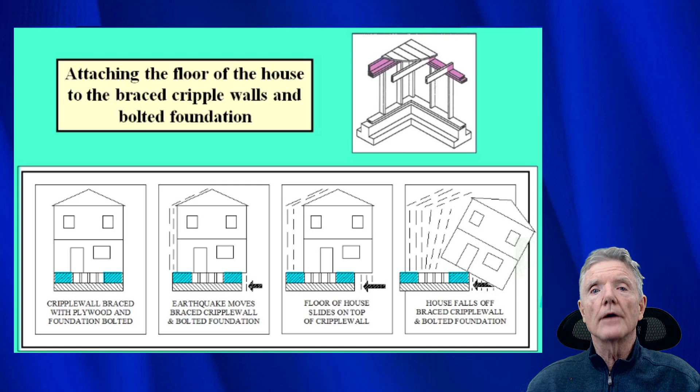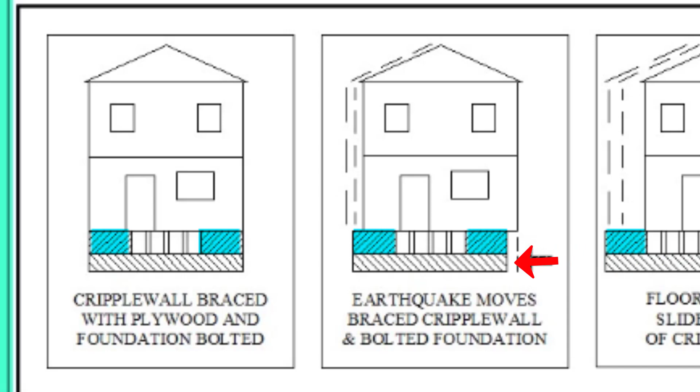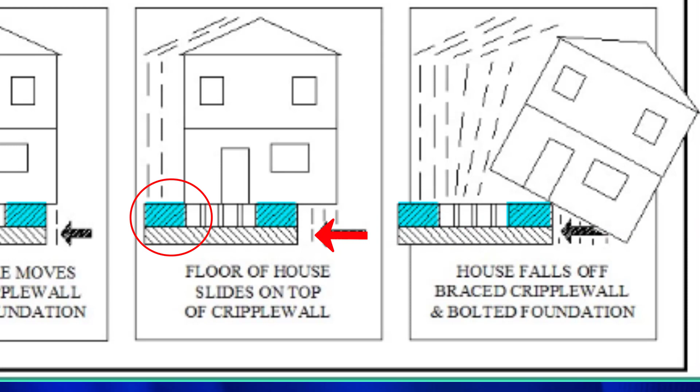So here you can see the braced and bolted cripple wall sitting on the foundation. As an earthquake force comes again and pushes underneath the house as the ground moves, you can see how the house is starting to slide on top of the cripple wall. As it continues to slide, underneath the house moves even more. As you can see on the right, it can fall off completely.

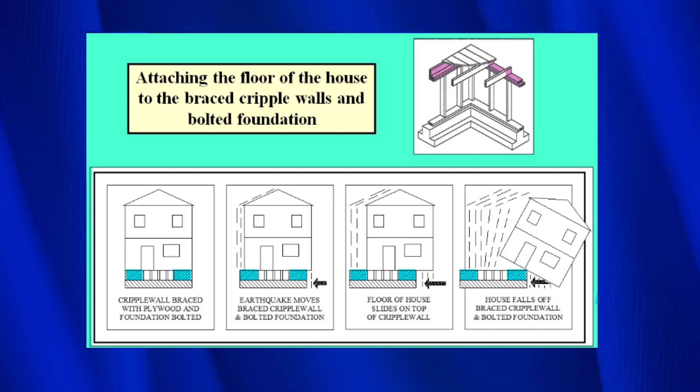So what we use is pieces of steel, also called connectors, which you'll see photographs of in a minute. The floor connectors are the last part of our cripple wall retrofit, and let me show you how they work. So this is the floor that you walk on. And then this is the floor framing that supports the floor you walk on. And then this sits on top of the cripple wall. And then this right here is the cripple wall itself.

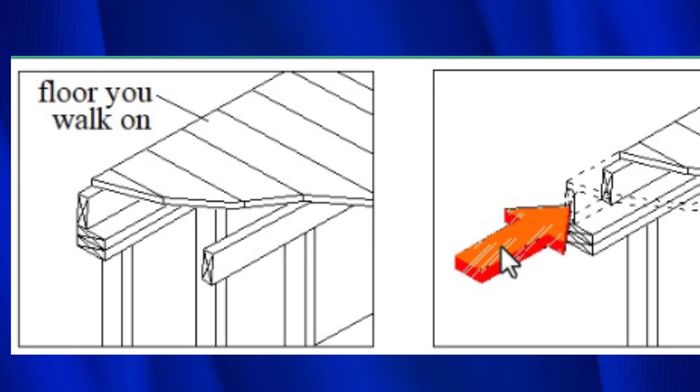Now, an earthquake comes, we can't have this floor framing slide on top of the cripple wall. Naturally, we'll get damaged like we saw before. So here you can see what happens. Earthquake forces come here, and it slid a little bit. It slid, I don't know, 8 inches or so. We can't have that happen.

So what we do is we install these right here called shear transfer ties or floor connectors. And that way, when the earthquake force comes this way, that force goes into the top of the cripple wall, and because the cripple wall is braced with plywood and it is bolted to the foundation, it can't move.

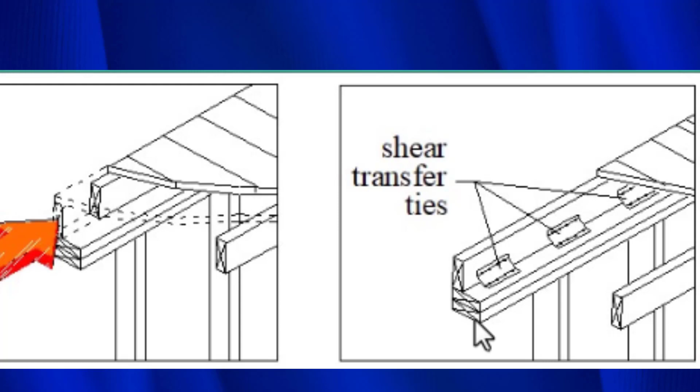And now that we've got our cripple wall, if it were covered with plywood and then it was bolted at the bottom, we would then have a complete what's called a shear wall. A shear wall is something that resists earthquakes. It's made out of bolts, it's made out of floor connectors, and it's made out of plywood.